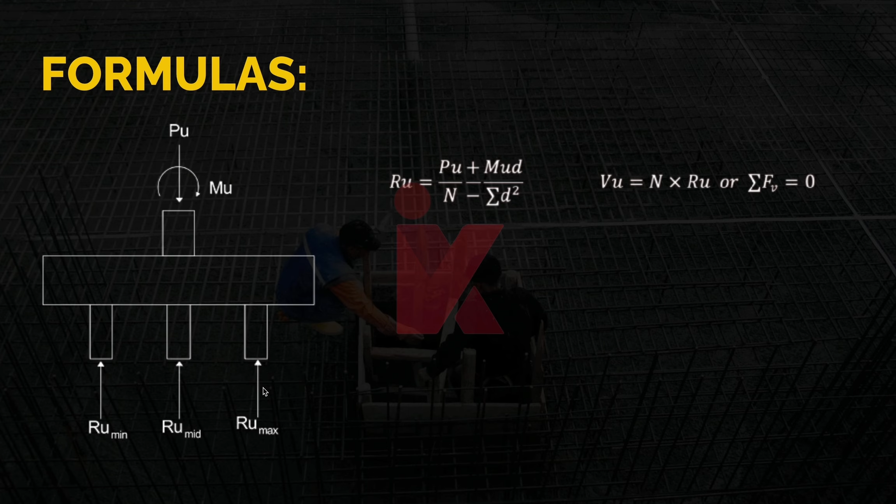Wherein yung D natin dito is yung distance from the moment center going to the center of the pile. Ang VU natin is equal to ilang pile yung affected times yung RU na nandun. Or pwede din naman na yung summation of forces vertical since mga vertical forces naman na yung kinoconsider natin. Later on, makikita natin kung paano natin ginagamit yung summation forces vertical.

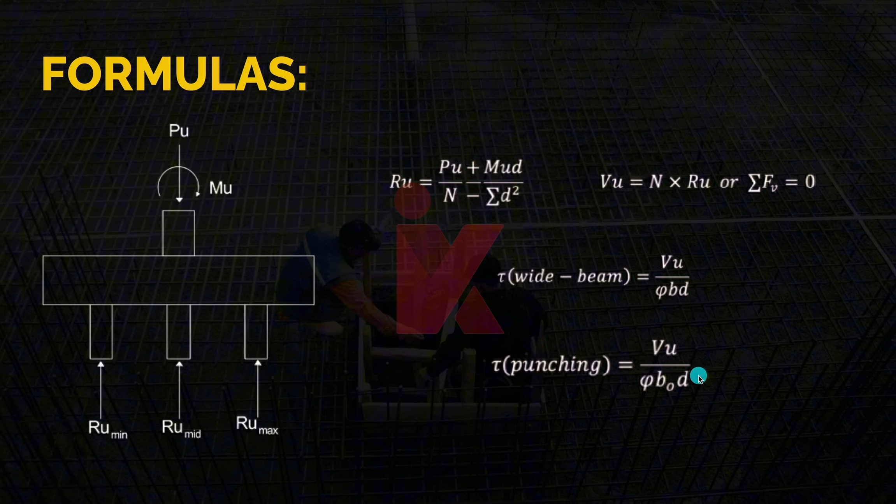Meron din tayo dito, pag tinatanong, what is the shear in the wide beam? So meron tayong formula, the same sa footing, VU over reduction factor BD. Pag punching shear naman, ganun din, VU over reduction factor BOD. Wherein BO is the perimeter of the sheared area.

So punta tayo sa example. The pile cap shown in the figure supports a 500 mm square column. So ito daw, 500 mm.

Given dimensions, A is equal to 0.9, B is equal to 2.4. And the effective depth is equal to 600 mm. Yung diameter daw ng pile is 350 mm. Column factored loads, PU is equal to 1,800 kN. MU is equal to 180 kN-m. Strength reduction factors natin, meron tayong 0.75 for shear and 0.90 for moment.

Wherein, ito naman, yung sa moment natin, hindi naman na natin magagamit kasi meron na tayong MU. So balikan natin yung drawing. So ganito yung magiging itsura nung footing natin pag tinignan natin sa other views. Yung PU natin, and since wala namang sinabing direction, yung MU natin, kung MUX ba siya or MUY, so mag-assume na lang tayo sa iisang direction.

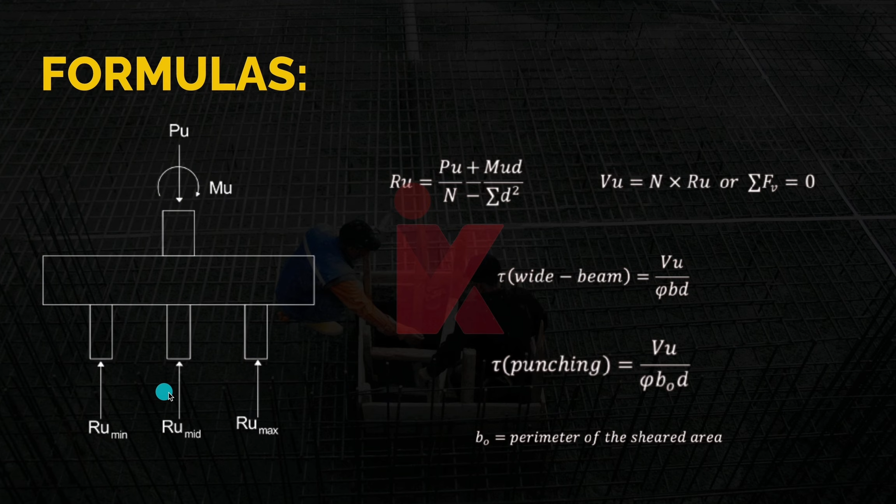So kapag ganyan, ito yung nagiging RU max kasi nakikita naman natin yung MU natin, pag ganito, yung force niya. Meaning, mas mabigat yung kinukuhang force nito. While dito, neutral lang kasi yung PU lang naman yung nabubuhat niya. At dito, diba? Kasi dito pala moment center kasi, so walang distance. So magiging 0 lang din. So PU lang, literally, yung binubuhat ng RU mid.

O yung RU min natin, since pag ganun nga yung force, parang nahihila siya pataas. So RU min kasi, kapag kinompute natin, ito talaga yung pinakamababa. At sa formula, kaya ginagamitan natin ng minus kasi nga, yung force niya is opposite sa RU max. Makikita natin sa example mamaya.

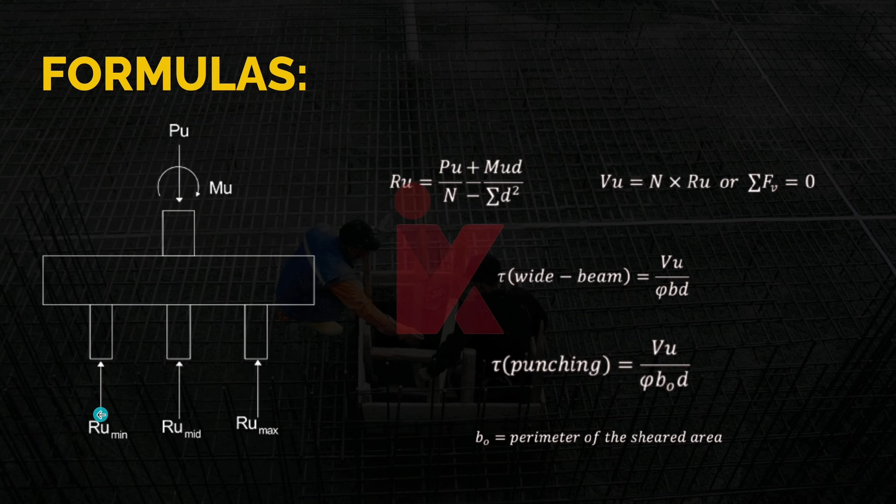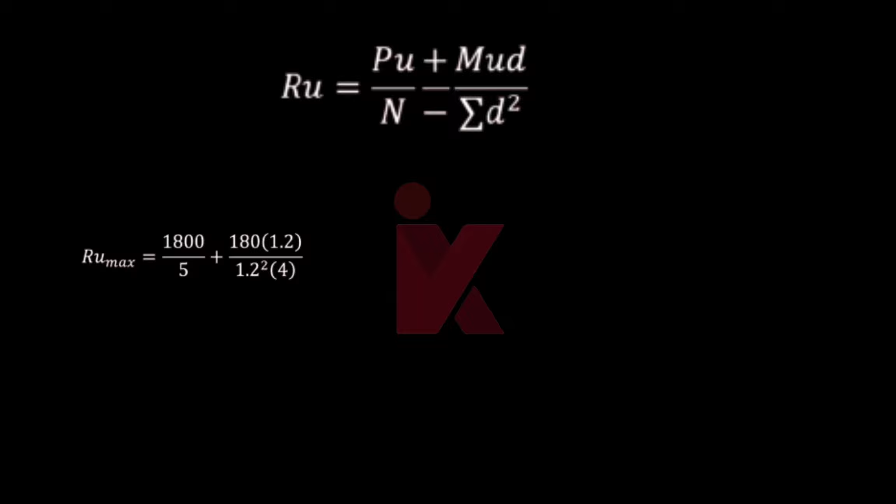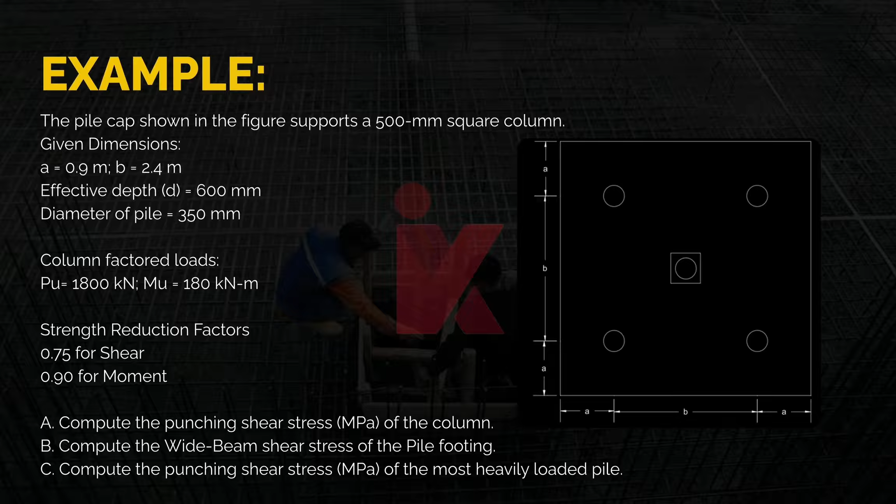So first step natin, gagamitin natin yung formula na to, para makuha natin yung RU min, RU mid, at saka yung RU sa maximum. So unahin natin sa max. 1,800 over 5 plus 180 yung MU natin, times yung distance natin na 1.2. Bakit naging 1.2? Makita natin sa example, 2.4 meters yung B. So from the center of that, going to the center ng pile, syempre, 2.4 divided by 2, that's 1.2 meters. Tama? Okay. So over 1.2 square times 4. So makukuha natin 397.5 kilonewton.

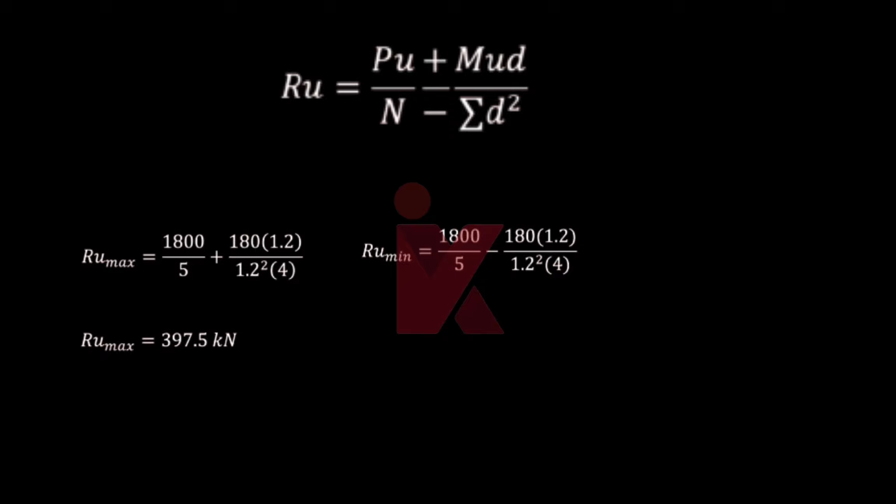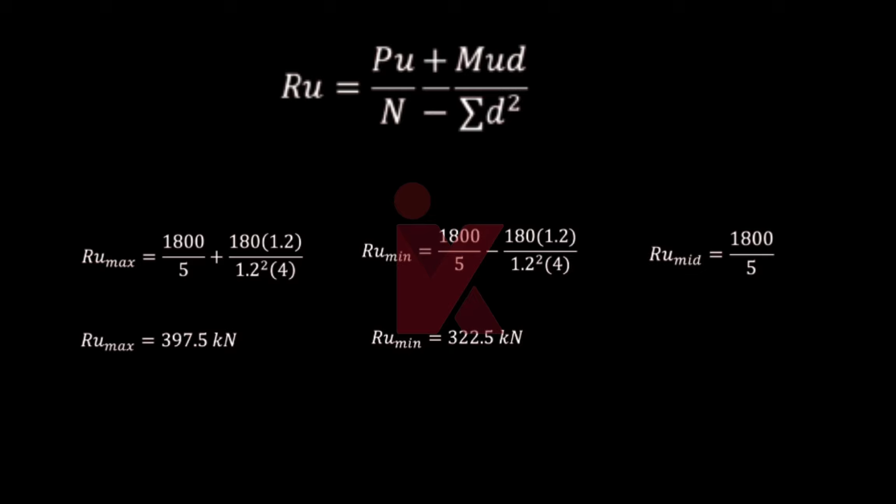RU min, yun lang din, pero gagawin natin minus kasi opposite yung forces. So makukuha natin 322.5 kilonewton. Sa RU mid, pinaikli ko na kasi nga tinanggal ko na yun kasi 180 times 0 is equal to 0 lang. So tinanggal ko na. So RU mid is equal to 1,800 over 5. So that's 360 kilonewton.

Now, let's answer the first question: compute the punching shear stress of the column. When we say 'of the column,' the area we take is around the column itself. We'll have BO here, wherein we add D over 2 on both sides, making it C plus D.

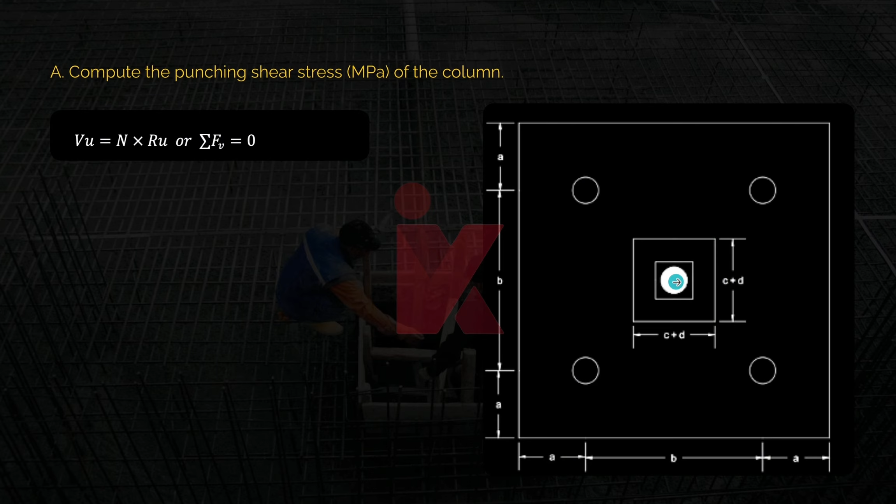So for VU, we can use N times RU or the summation of forces vertical. It's better to use summation of forces vertical here since we saw in the drawing earlier that the middle pile has an opposite direction force, which is PU. So PU minus RU mid, that is 1,800 minus 360 kN.

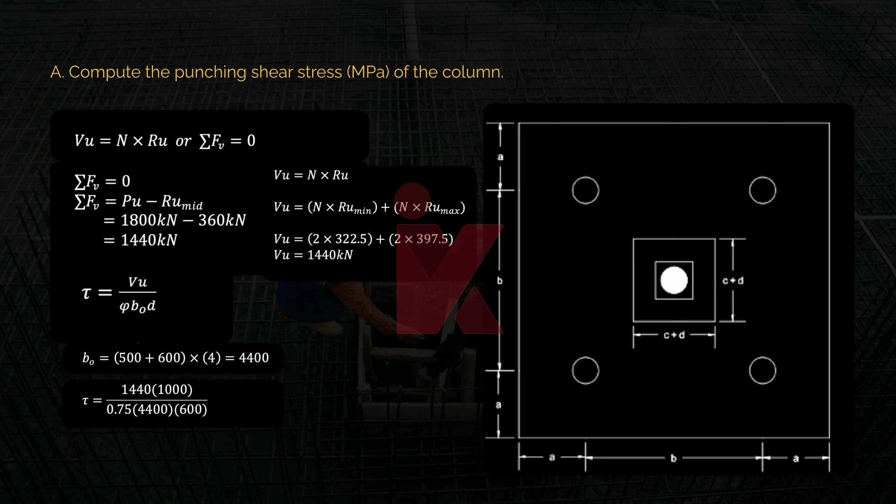VU is equal to the reduction factor times BOD for shear. So we calculate BO, which is the size of the column plus the effective depth, times 4 since it's the perimeter of the sheared area. That is 4,400 mm. Substituting everything, we get the shear stress of 0.727 MPa.

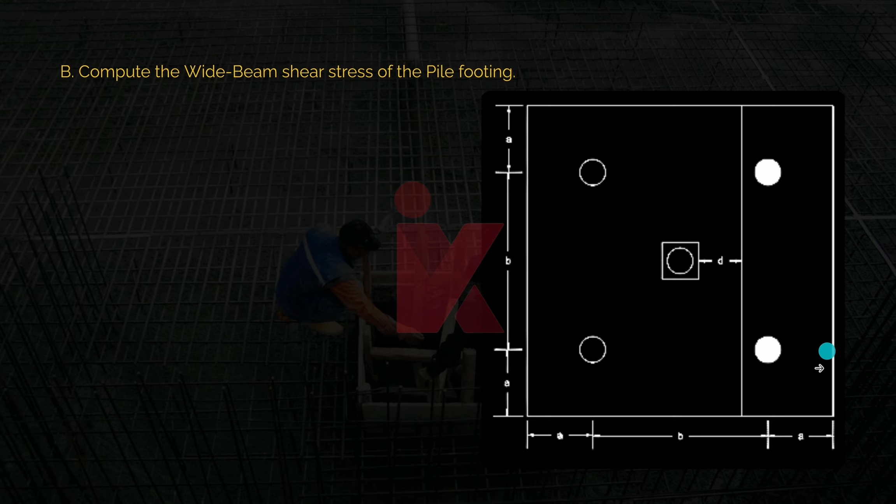Next question: compute the wide beam shear stress of the pile footing. Same as with the footing, we draw the effective depth from the face of the column and draw a line — this becomes the area affected for the wide beam. But since this is a pile footing, we only count the piles that are affected. There are two, so we use the same formula.

VU is equal to N times RU, or the summation of forces vertical. Same thing here. There are two piles at 397.5 kN each, which equals 795 kN.

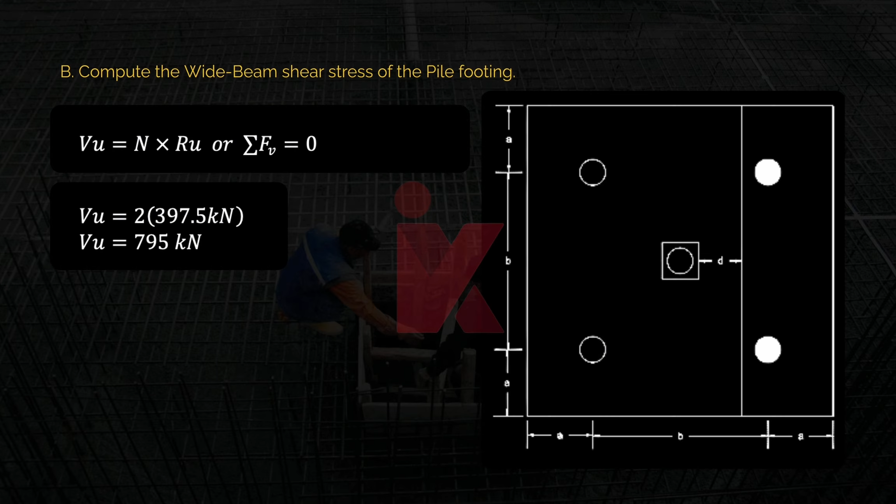Sir, why didn't we consider RU min here? Well, our VU becomes lower if we consider that one. And as I said, when investigating or designing, we are always looking for the critical section of the footing or the member, so we take RU max.

So we use the VU we got. We already have everything: our B is 4,200, which is A plus B plus A, so that's 900 plus 900 plus 2,400, times 600 mm.

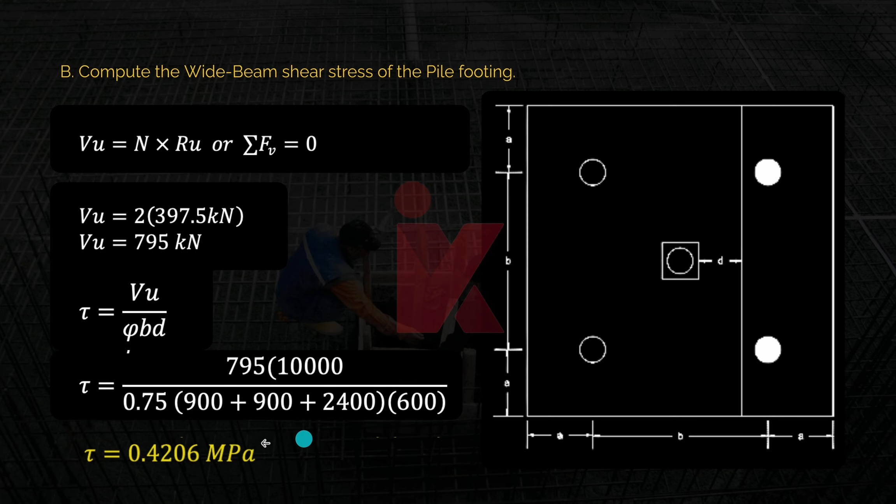We get 0.4206 MPa. Next question: compute the punching shear stress of the most heavily loaded pile.

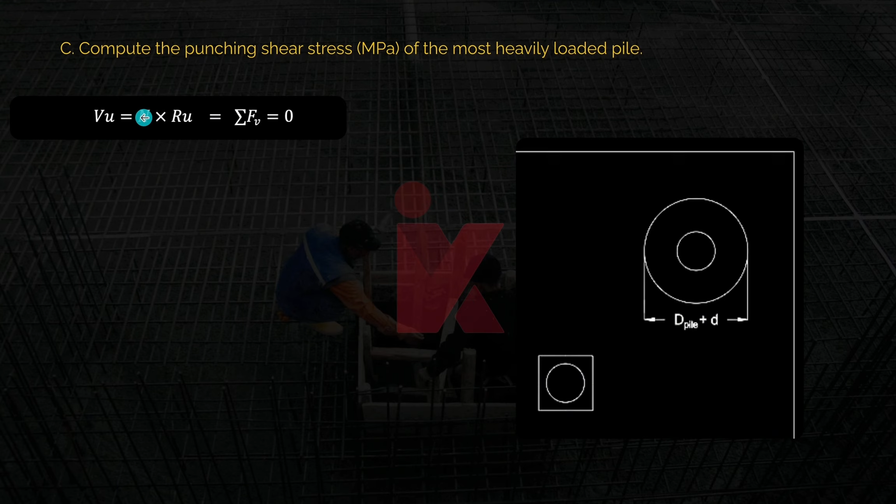Here, we only consider one pile, the RU max, since it's the heavily loaded one. So we take this single pile. And since the pile is circular, the punch it creates will also be circular. First, let's get our VU, that's N times RU, just equal to the summation of forces vertical. Since it's only one, that's RU max, which is 397.5.

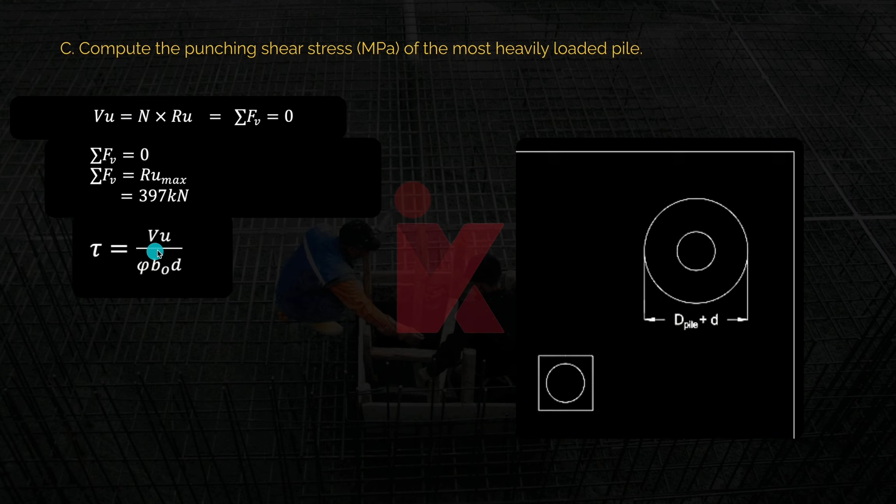I made a mistake there, I dropped the 0.5. So that's our shear, VU over reduction factor times BOD, wherein BO is pi d, since it's the perimeter of the sheared area, and since this is a circle, we use the circumference.

So pi d, where the total diameter is the pile diameter plus the effective depth, since we add d over 2 to both sides — pile diameter plus d. So it becomes pi times 350 plus 600, that's 950. Substituting everything into the formula, we get 0.296 MPa. That simple.